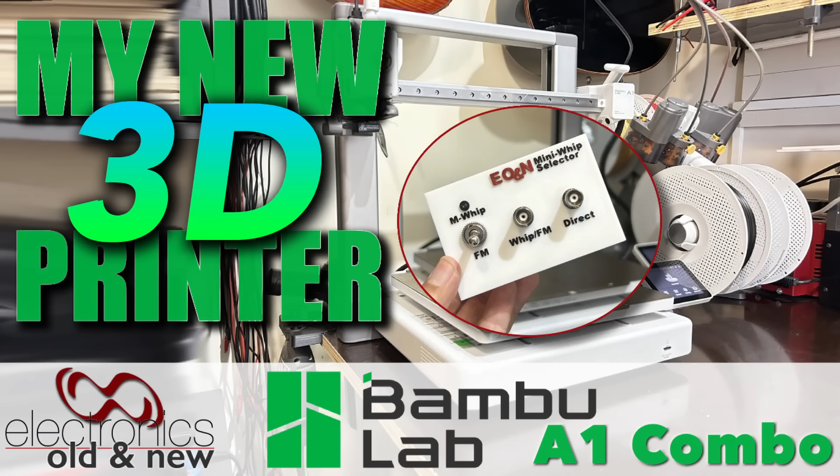Say hello to the new addition to my workshop, my new 3D printer. I got it about a week ago and I've been playing with it a lot. And I got to tell you, this thing is absolutely amazing. This thing is fast, really, really fast.

Now I got the combo version. It's the printer itself and it's got that thing over there. Now that thing over there takes 4 reels of filament, and you can see that they're different colors. What it means is that I can actually do multicolor printing. Few tricks involved, but it does work.

And the reason I really wanted this particular printer is that everything that I read and saw about it told me that this thing was incredibly fast. Did I mention it's fast? It is incredibly fast. When I first put this thing on, this thing was flying around so much, I thought the prints were going to be a total piece of rubbish. And instead, they came out better than my previous printer.

And my previous printer, believe me, I was getting old just watching it. It did its job, but it was incredibly, incredibly slow. I remember working with dot matrix printers in the old days, and when the inkjet came out, you notice that incredible difference in speed. Well, this is the same thing that I've experienced with this addition, and I've been playing with it quite a bit.

And the reason I'm doing this video is I want to show you how I use it to design and build new undershelf modules, which were becoming a bit of a problem because I was running out of the actual enclosures. And I also wanted to make this whole thing completely autonomous, so I wouldn't have to depend on any other service outside of my workshop to be able to do them. This thing allowed me to do it. This thing has replaced so many stages of the work that I had to do to build those undershelf modules. And I'm going to show you one of them.

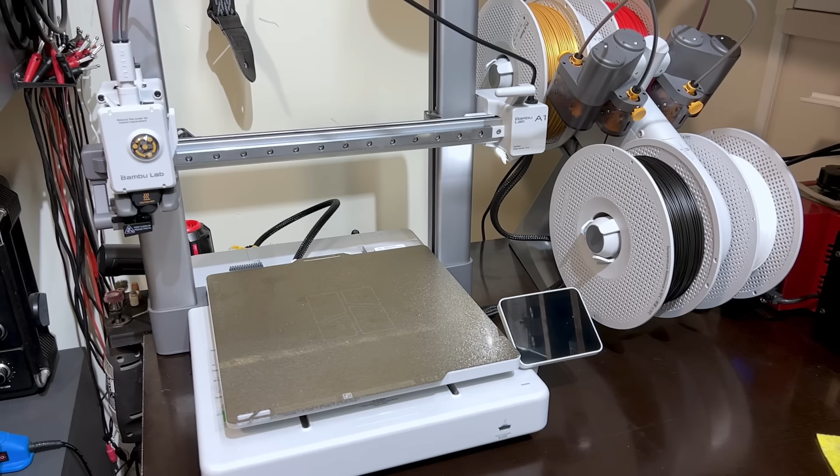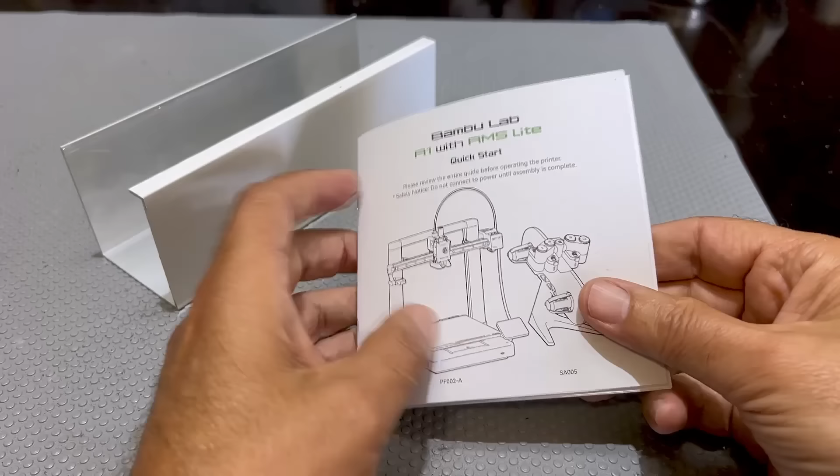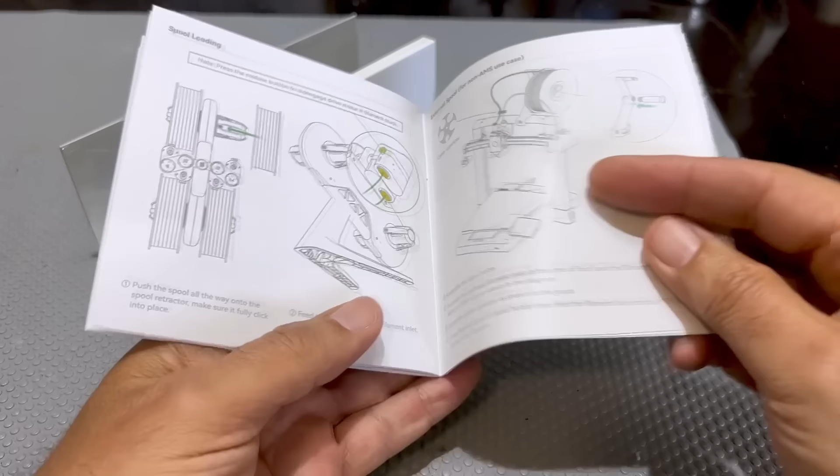Now, you can probably guess I'm not going to give this usual sort of unboxing video that people do. I don't particularly like that. What I did do is follow the instructions. They were very, very easy to follow. There's also a video that I'll link in the description below, which is very well done and describes it in really great detail. Incredibly easy to put together. I got this thing working and printing within probably less than an hour, and most of that was watching the video. So it's really the sort of thing that you just get and you can use pretty much straight away. So let me show you what I'm talking about when I talk about those undershelf projects.

I've been building these undershelf modules with all sorts of little tools and pieces of equipment that I need. This particular one is the mini whip antenna selector. It's looking worse for wear. It supplies the mini whip with the DC voltage that it needs. It brings in the signal. It then allows it to come out here. And I had a FM antenna coming in straight through there as well. I wanted to make this selectable, and that part of it is coming in a future video. But what I wanted to do is build this whole enclosure setup in a more efficient manner.

Now, I've been using these aluminum sections, which I had some metalwork shop cut for me. All this is, it's a rectangular section, and they cut there and they cut that off there, and it allows me to work on them. This is a 20 centimeter one. I also had 10 centimeter ones. I was limited to the 2 sizes that I had. If I wanted to use this, I'd need to get one of these cut somewhere, and I built up a bit of a stock, but I'm running out of them.

Then I would have to design the faceplate, drill the holes, right? Drill the holes, and after putting the board in or whatever electronics I wanted to put in there, I can then very easily solder to them.

This one is a real mess. That's why I wanted to change it. And then I would need to draw the faceplate as well. So I would draw that in a drawing program, I'd go to a printer's, they'd print it out on self-adhesive paper or film, and then I would stick it on there. Sometimes I sprayed it with lacquer just to protect it, cut the film out, put everything through. If I scratched this at all, I had to redo the whole thing.

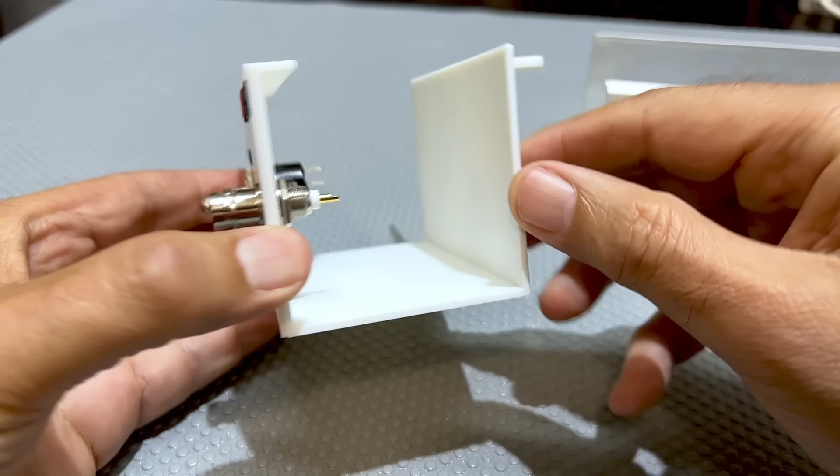At the back, I normally wouldn't even put a label on there, but I'd have to put one of these angle brackets on here so that I can connect it to the top. Now what I've done is I've made this whole thing 3D printable, and it really, really works out well. This is what I've got so far. Now, what have I got here? I've got the same profile because that's perfectly acceptable for me, and the shelf is already set up with these things.

I 3D printed the actual profile. The advantage here is I can make it whatever length I want. I can make it bigger or smaller. I don't have to stick to the 10 centimeters or 20 centimeters. So that's the first advantage. Secondly, when I print this, I already print it with the holes in there. So I don't have to worry about drilling the holes, making them bigger or smaller, deburring them.

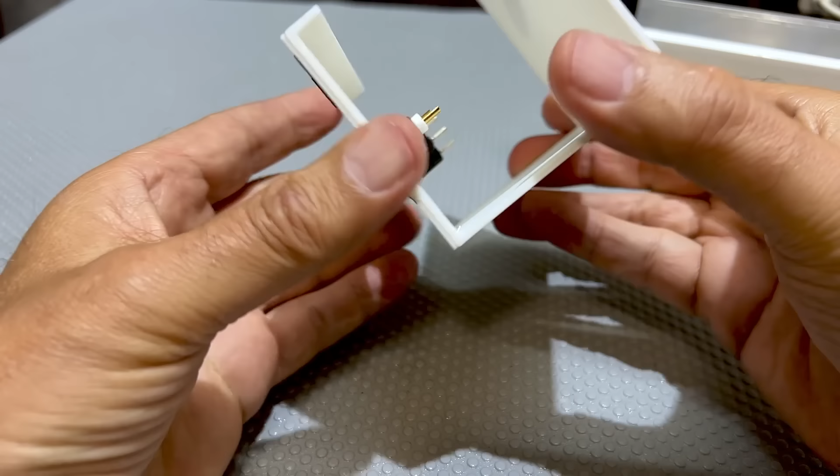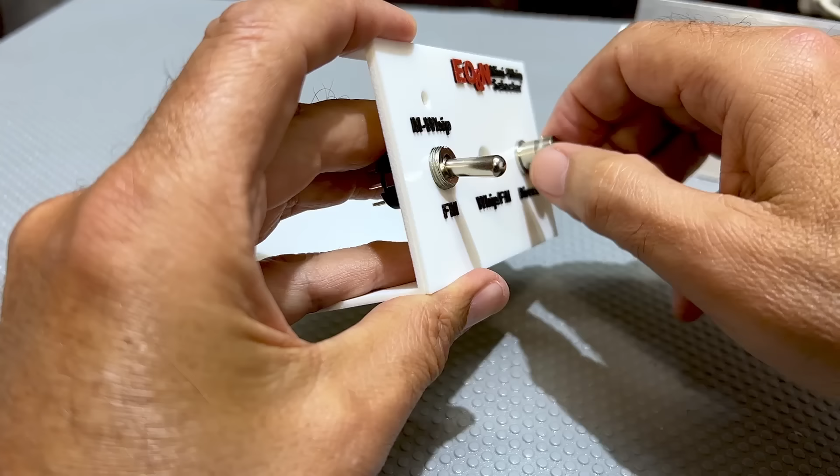The holes are there already, but there's something else here as well. I've made this as part of the enclosure itself, so I don't have to put that angle bracket on here. This particular one I've got to redo because I forgot to put the holes at the back. And the other thing is, because of this printer's color printing capabilities, I've also been able to do something else. And that is really one of the great advantages of having a color printer: you can actually print the labels.

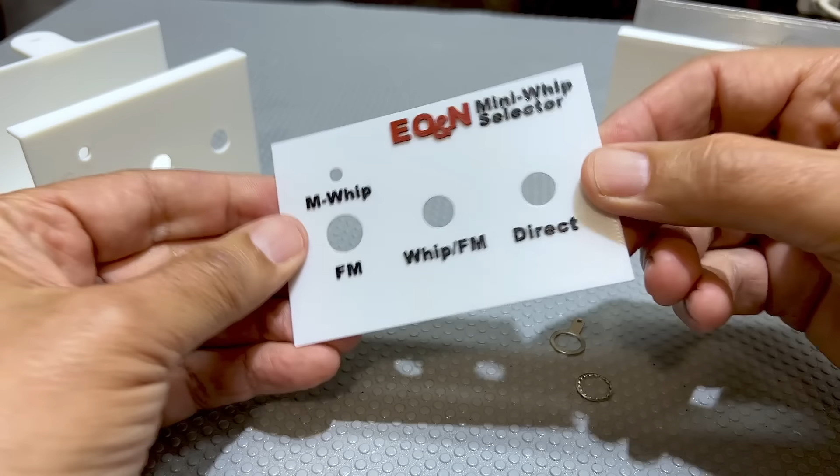What I've done is I've made a label section which will be exactly the same as the front. So it fits perfectly, and I can print the labels on here. It's actually pretty good. This is raised, it's embossed. And the reason I did it on here is because when I describe to you how the 3D printing works, you'll understand why I wanted to do this separately. Actually, I'll explain it now.

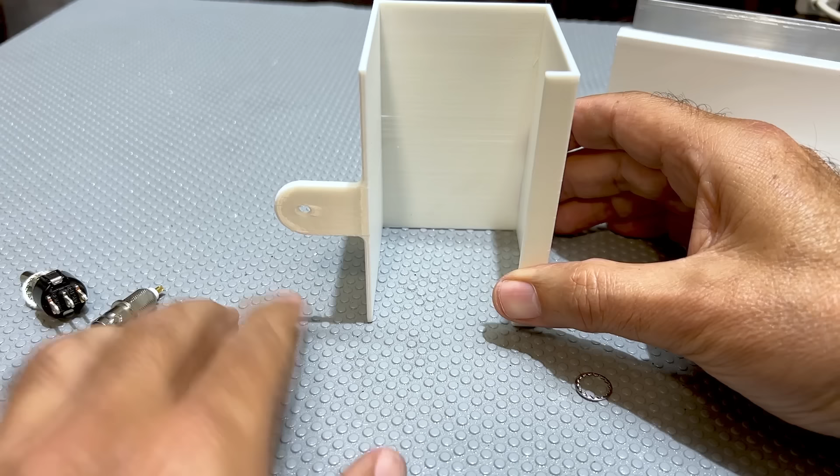When I print this particular one, I print it vertically. And the reason is it works well for me. It then needs very few supports. The only supports it needs are under here. And it actually does build supports up to make sure that these holes are perfectly round. You wouldn't need them really, but I'll let the whole thing do its business. So I print this thing vertically. And then when I print this, I print it horizontally.

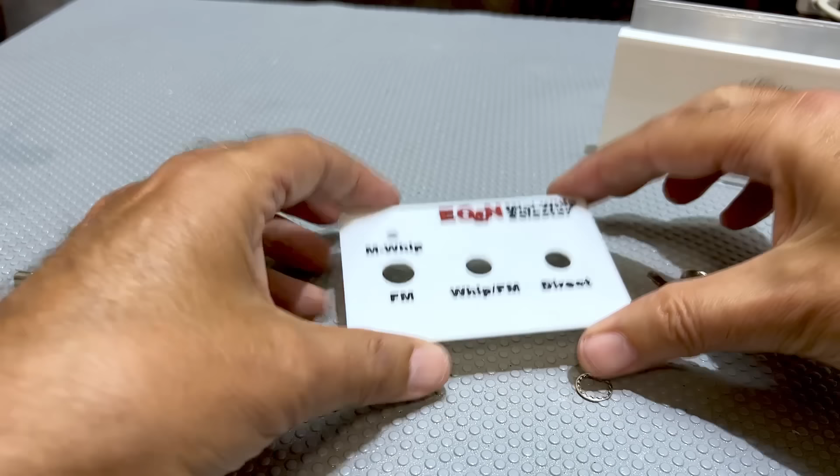And the reason is that when a 3D printer changes color, it actually changes the filament that's in the head. So you've got to think of this as a procedure coming from bottom to the top. It's printing from the bottom. First layer, second layer, third layer. So once I've printed this base in white, I now need to change the filament color to black. And if you see this Electronics Old and New logo, the beginning part is black. It's the same thickness as those letters.

It's in black. So what it does then is the printer goes and changes the filament, and it cleans out the old filament, and little pieces get thrown around. The poops, as they call them. So it's a little bit of wasted filament. So it cleans the head of the white filament. It then spools in the black filament, prints the layers that have this text on it in black, including the base of that E, O, and New.

And then it goes and changes filament again to red. So it cleans out the head again, brings in the new red filament, and it prints the layers that are in red over here. Now this is actually done in medium quality. I haven't even gone to extreme. This one was printed in the fast version, so the lowest resolution. I think it was 0.2 millimeter layer height, nothing special.

There are various presets on the printer itself, and I used the one that would give me the quickest print. And then this one, I put it to a better resolution because I wanted finer work on the lettering. And I am incredibly pleased with this. I am really pleased with this.

Now, you'll be saying, well, this is plastic and you might need shielding. Yes, you might. Now, I've been using the undershelf units without a common ground. So what I'm going to do here is just get some of that aluminium foil. If I need to shield it, I just put a layer on each side and I can decide what I want to do with the grounds.

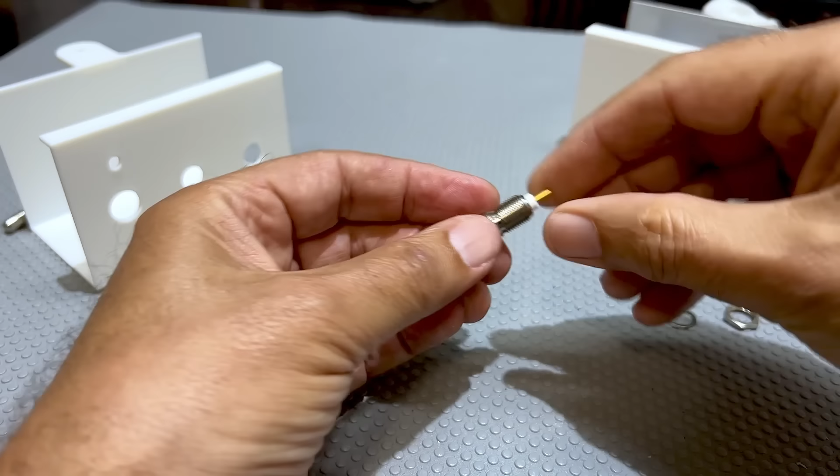The other thing is that a problem I had with this one is because I didn't want common grounds, I had to make sure that I used insulated connectors or sockets over here. These things are not the best. The ones that I prefer are these, but these are not insulated. I can't find the ones that have got the little bushing, the little plastic insulators, and these are the cheapest anyway.

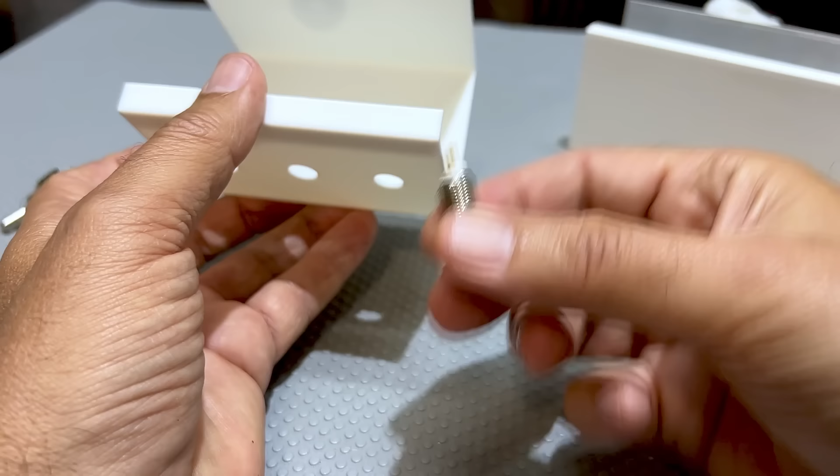So what I can do here is I can still use this plastic, but when I put the shield on here, I leave an opening where the socket's going to connect to, so it doesn't create a common ground if I don't want it that way.

So let me show you how I design this. I do this in Fusion 360. You can do it in SketchUp. You can do it in all sorts of CAD programs, 3D modeling programs. Fusion 360 is the one that I've basically learned enough of to not want to move away from it. Once you've learned something, stick to it.

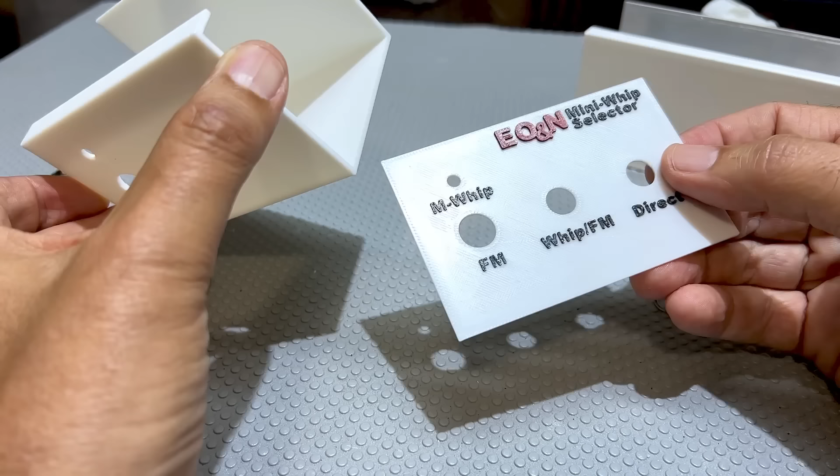And then I'll show you the slicer program that is actually indicated as the best one for this printer. It's actually Bambu Lab Studio. They've got their own one, and that was incredibly easy to use, especially for this particular printer. Just so that you know, one of the greatest features that I found on this is that you can actually send the files to print via your local network, via Wi-Fi.

Now, with the one that I had, I had to actually save it onto an SD card, change the SD card around, put it into the printer and print it that way. With this thing, I just send print from the computer and it does the job. So let me show you the design for this.

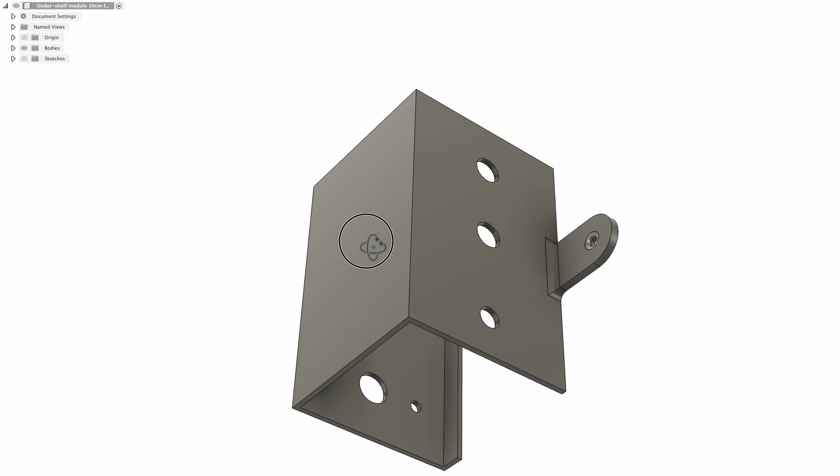Well, folks, here's the actual design of that module. I'm not going to go into all the detail on Fusion 360. This is not a tutorial on Fusion 360, but I will show you the steps that I went through to get there. And this is great because you can actually go to the beginning and start stepping forward, and you can actually see what was designed.

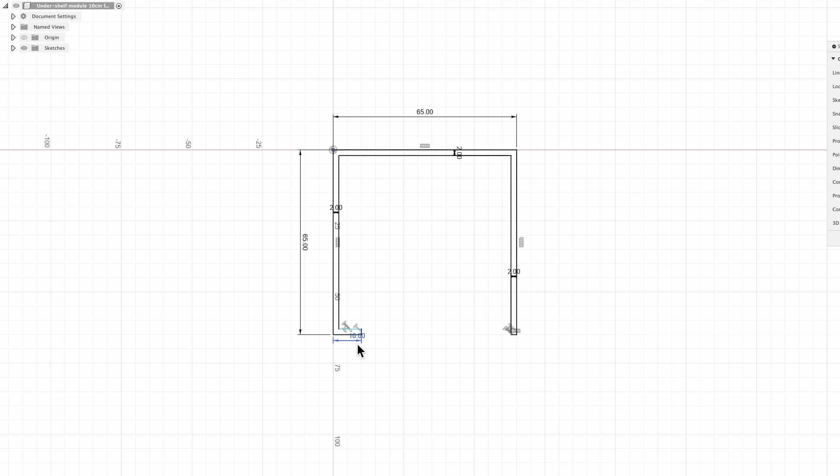If I look at the sketch that I did here, I created the element 65 by 65 millimeters, 10 millimeters there. I gave it a wall of 2 millimeters thickness, and then if you carry on going forward, you see what happens. This thing gets extruded. So I extruded up 10 centimeters.

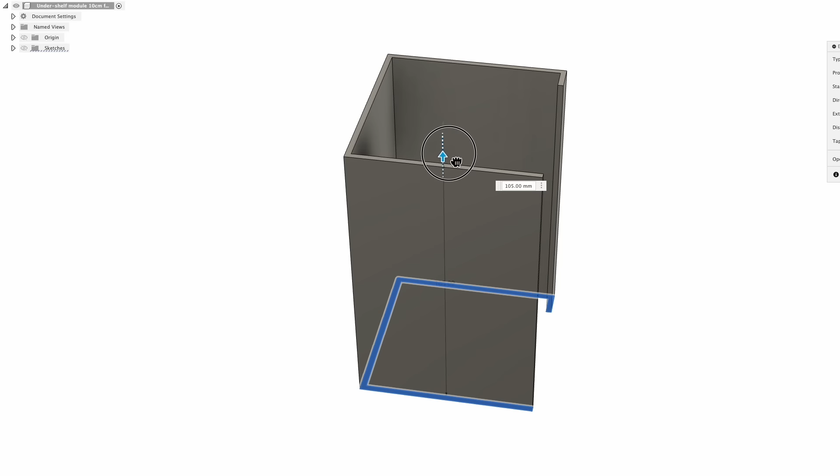Now this extrusion, here's the beauty of it. If I want to make this bigger or smaller, I can do that. I can make it any height I want. Now, as it is, I've got it at 100 because I designed everything for the previous version. So I left it at 100. But that is now something that I can use and make it as big or as small as I want.

And then if I take it one step further, what did I do next? I'm going on the timeline down below because you can actually step through. Yeah. I drew the 3 holes on here, and I can show you those as well. That is the 12 millimeter diameter.

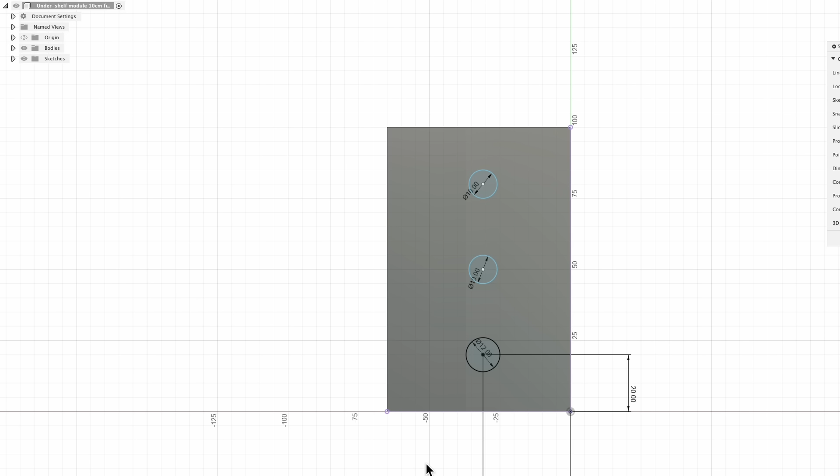This is about halfway up across, actually I should make it exactly halfway. Yeah, I'm probably going to shift this up a bit. This is 30, let's see, what did I make this? 31, so I can make it 65, 32 and a half, 32.5. Make that 32.5, and that will also go to 32.5. So I can just move that. What am I moving? 1.5 minus 1.5.

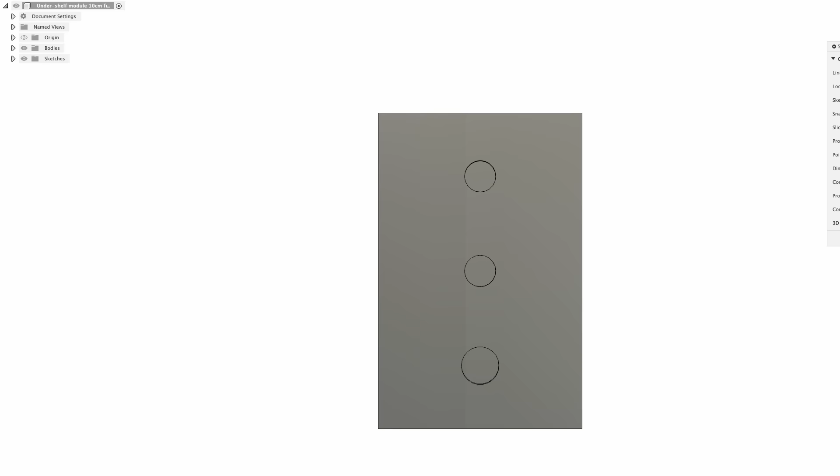Okay, so that gets done, and then you can extrude it and you get your holes. So I've got the holes in the front the way I want them. Brilliant. Nothing at the back yet. No rounding, no nothing. And then if I take it further, what did I do next?

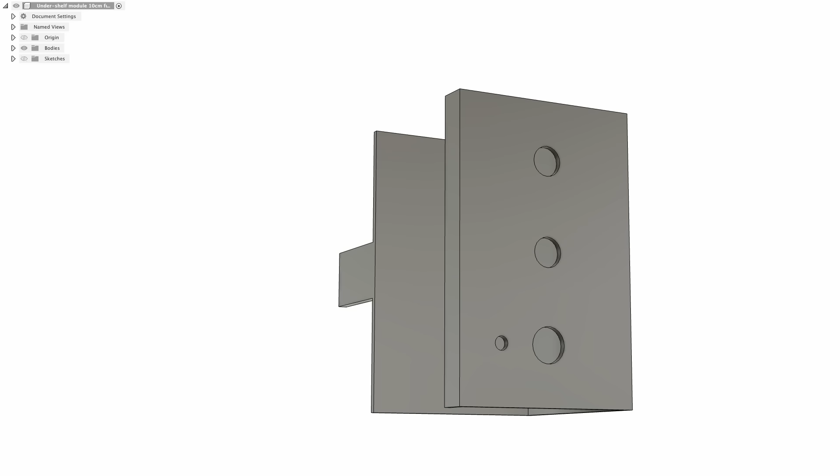Well, I made the hole for that LED, as you can see, nothing too special. And then I drew that element at the back because I wanted it to come out, and I wanted to do it all in one hole in there so that I can screw it to the underside of the shelf.

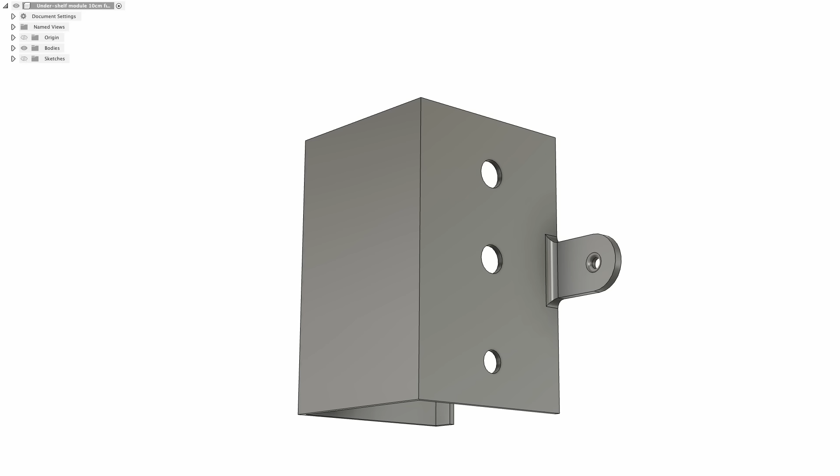I rounded the hole at the end there, and I made it a little bit nicer. Yeah, it's all nice and smooth and round. And then I put the holes in the back. Now the holes in the back, what did I use this for? I can't remember anymore. Yes, I put them at the back.

This one here is for the power. So 12 volt DC is going to go in here. It's a power socket. I'll be running this on a battery, which I'll show you when I build the project up. This one here is the mini whip coming in, and this one is the FM antenna coming in. Let me just check that this is halfway. I'm not sure if I did it the same as the other one. 32.5, yeah, that's halfway. So this is done.

Now, what do I do next? Well, I could do all sorts of other stuff. I could round this off. I'm not going to do that. I actually did a version where I built the sides up, but then I realized that working inside with the sides done is actually quite difficult. So I left it open, and I've designed these side panels that slip in here, which I'll show you in a moment.

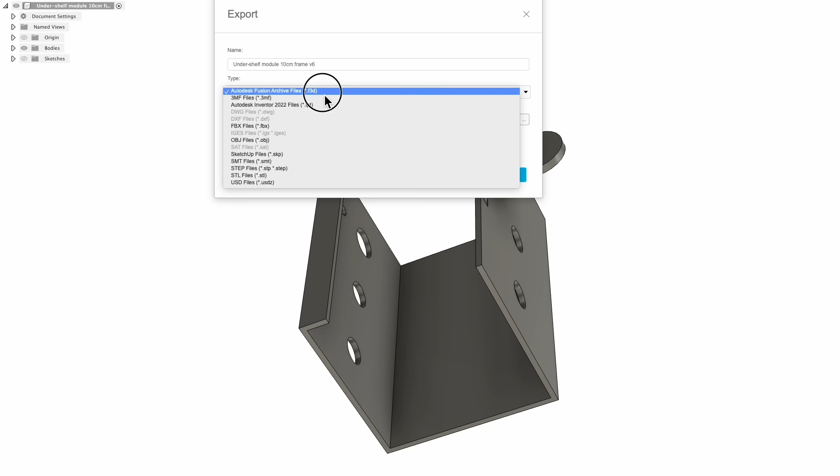But I can then export this. I'm going to export it in STL, and I'll export it to the desktop. I'll show you what I do with that next. So that's one part of this whole thing. Let me show you the other one.

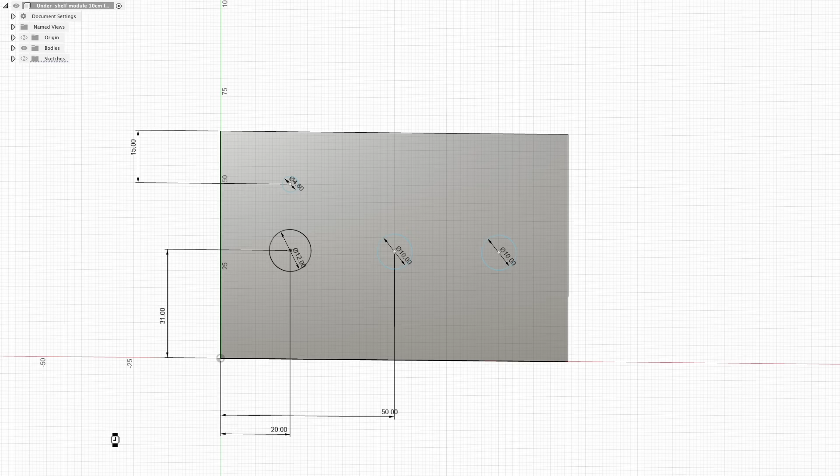Right, here's the front panel. And the front panel is practically the same as I did before. I do need to make one small change, and that is, I think it's on this one here. Yes, I need to make that 32.5. Otherwise, it will not match up with the ones I've got at the back, or rather on the main module.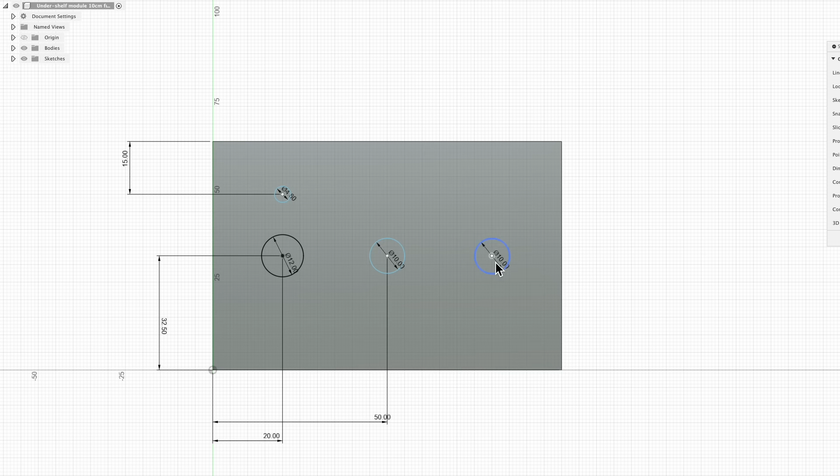So that's all done. And then this one is actually thinner. This is actually 1 millimeter thick. So you can see that. That's a very, very thin layer, done on purpose so that it doesn't actually add much thickness to the whole thing. Then what I did next, let me go back to the timeline. Then I put the logo on and the name of the module, and then of course the other labeling that I want done.

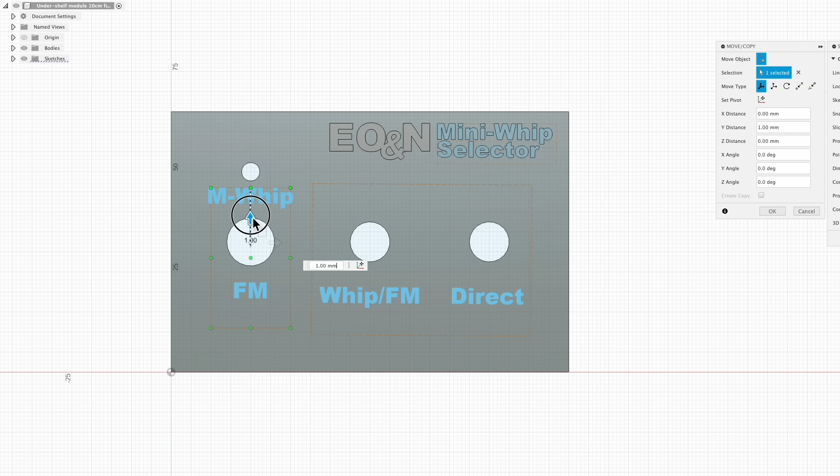Now, the way I did this is I did the writing on here, and then I extruded it. I should actually move this up 1 millimeter. What do I need to move it up? 1.5. Because I did the other one at 1.5.

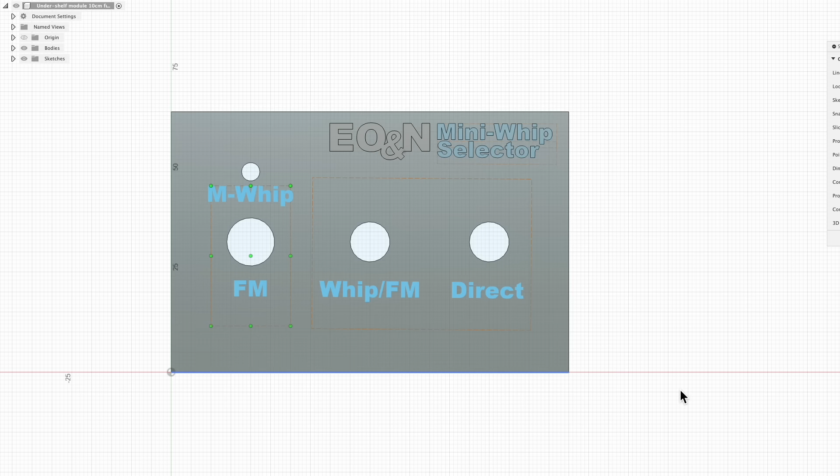So I've now got this as sort of a template, because I can come back at any time and change this. I can actually edit this. You see, if I do a different unit, I can edit this whole thing, change the text on there, and I'll have a new faceplate. But this one is ready, and I'm going to save it. And I'm going to do the same thing. I'm going to export it to STL. This is the front panel. Export that to STL. Okay, that's gone.

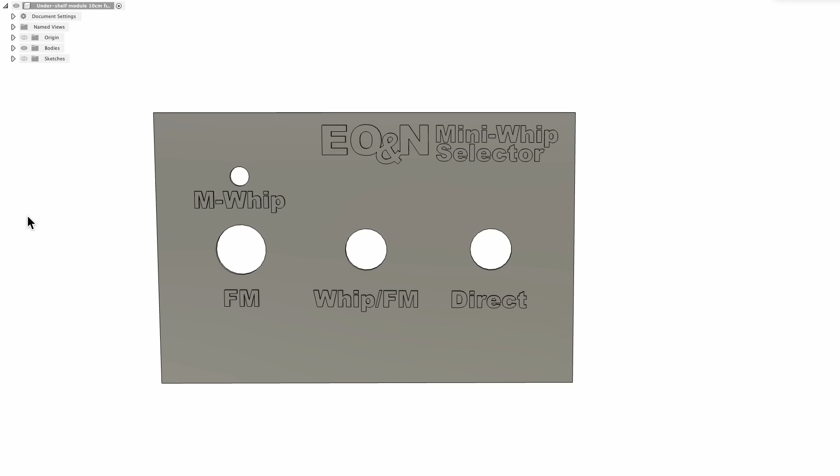Now I've got another one, which is the back panel. And the back panel is practically the same idea. I designed it. I did a cutout there for that little unit that's going backwards to hold that L bracket. And as you can see, this thing is also 1 millimeter thick. This one I can export as is. I'm not making any changes.

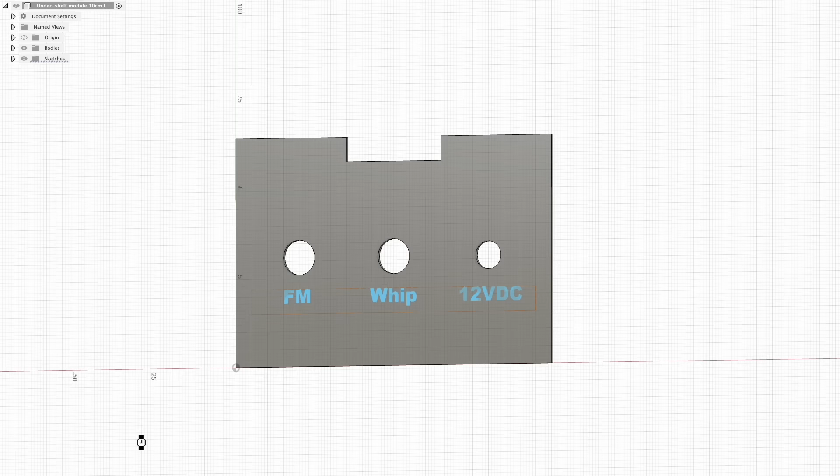But as you can see, I can very easily edit any of this, depending on what I want to print. So effectively, these 3 files are going to be here as templates in a way, so that I can then just adjust it any way I want, depending on what module I'm building. So let me export this one as well.

Right, and I have one more thing here, which is this one. This is the side panel that I've designed, and this thing takes 2, but I print one and then I mirror it and I print the other one, and it fits nicely into the side.

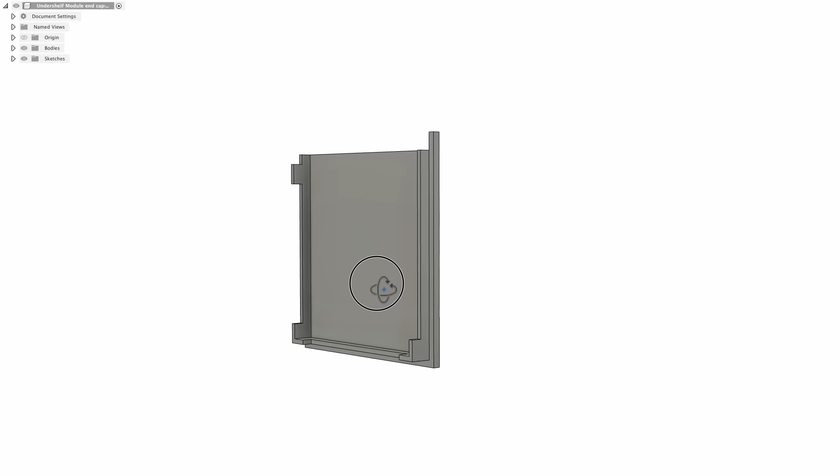There's no mystery here. You've got to look at quite a few tutorials on Fusion 360 to get to this point. Some of you will be faster, some of you will be slower, but it's actually very logical. This whole idea of modeling in 3D is very, very logical. I like it. So let me export that one as well.

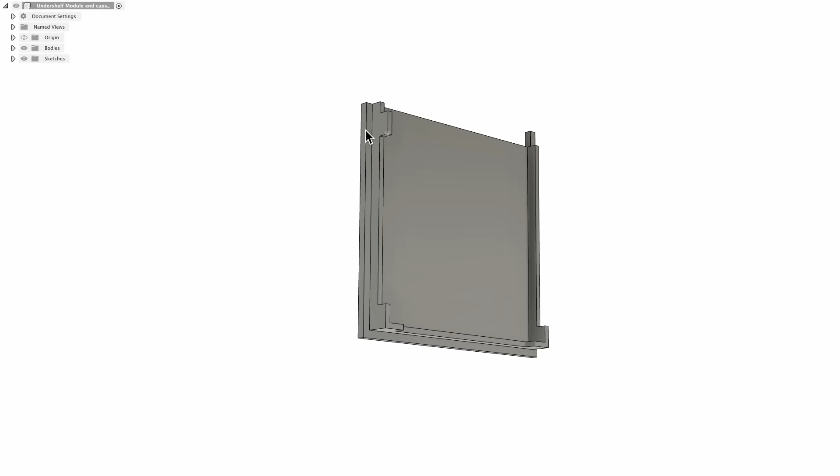Right, so we're finished with Fusion 360. Now we've got to slice it. We've got files that are 3D model files, STL files, and now we've got to bring it into the actual program that creates the file that the printer wants to see. Let me show you what that looks like. And here's the software that I use. This is Bambu Studio, so you download it for free.

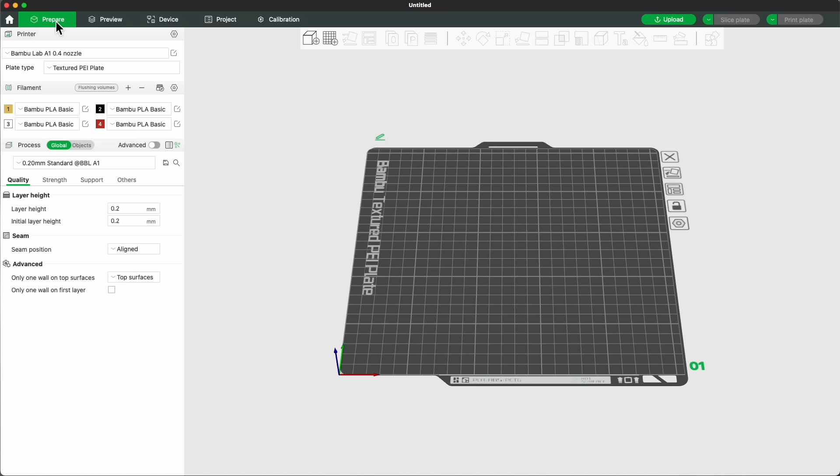And in that description that I gave you in the beginning, or showed you very briefly, your printer is actually connected to the network, which means that from here I can send prints immediately to the printer and it'll just start doing its thing. But if I want to prepare a project like I want to do now, and I'm going to do the frame first, so I had it on the desktop, I just bring it in here and look what happens. Now, when I set this up, I literally left it like this and I said slice plate.

I hadn't put, okay, it's telling me that I haven't got support. Okay, no problem. But I literally did that with just something else I was trying, and I sent to print. I'm not going to do it this way. I'm going to actually go back, and I'm going to show you what happens here. The one thing that I've decided to do is I've decided to print it flat. So I'm going to actually do that.

Go back to prepare. And the one thing you need to do here is you need to tell it which filament to use first. Remember, I've got 4 filaments. I've changed now to black. These are the filaments over here. This is using the AMS, automatic, what is it, management system, is it? Something like that. I can choose any of the filaments that I have on there. I've got gold, I've got black, I've got white, I've got red. I've actually just gone down here, changed filaments to black, to white rather.

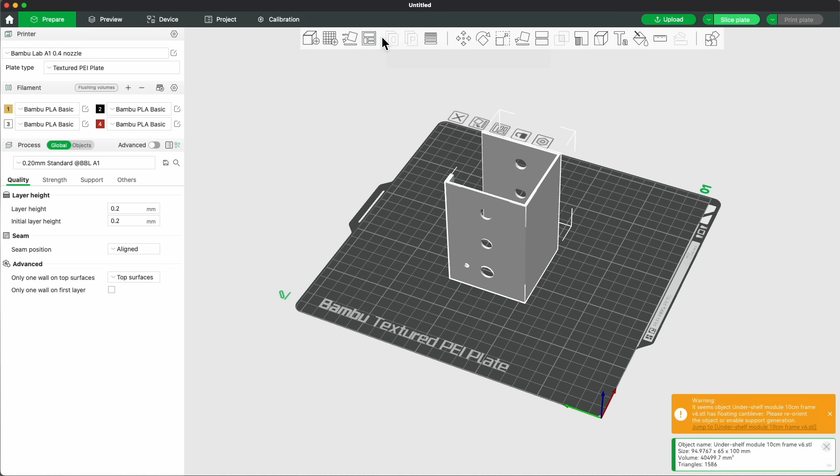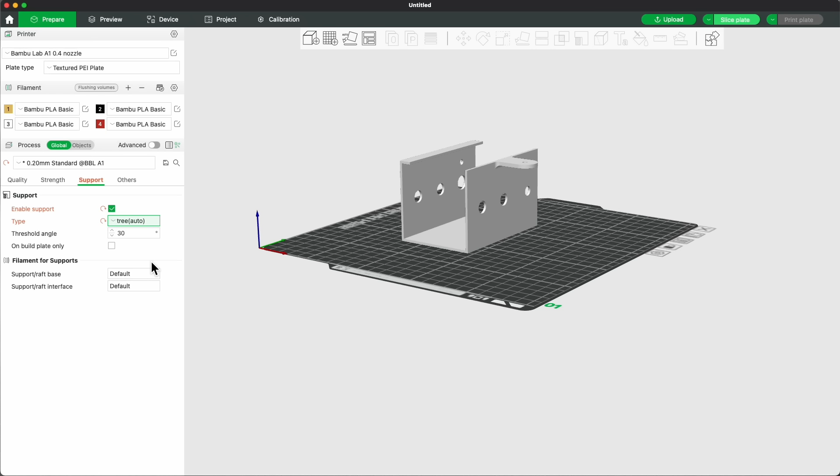So that's white. Now I'm going to just rotate this, and I'm going to rotate it so that it's flat. There. And I think I can just print it like this now, but see, this thing is an overhang, and that's an overhang. So I'm going to give it, let's see, I'm doing the presets. I'm using the presets as standard. Strength comes out at 15%. I didn't change any of this. The only thing I did is I enabled supports, and I've made it tree. Just because I prefer them. They're easier to remove.

And if I slice it now, this is the slicing. This is what's going to print. Okay, the greens are the supports, and you just pop them out at the end. But you see, literally just using a preset, the standard, and just adding supports. And I can now, let's see what time this gives me. It gives me 6 minutes, 20 seconds prepare, printing time 1 hour 47. So this thing takes quite a while to prepare because it actually does bed leveling. It does all the configurations by itself before it starts printing. But this thing prints in 1 hour 47 minutes.

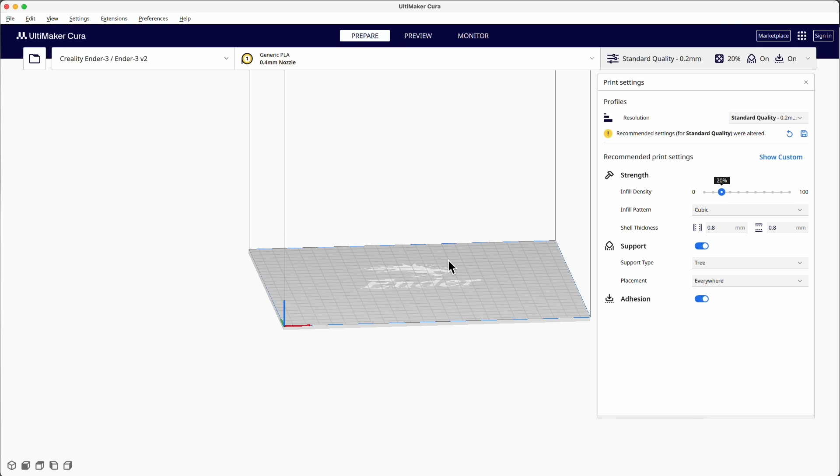Now, let us see what happens if I try to do the same thing with the other slicer on the other printer. Now, this is the slicer that I used to use, and it's configured. It's standard 0.2 millimeters as well. And if I do that, let me just push, where is it? I've forgotten how to use this now. Tree, yeah, I've got supports, okay. And I'm going to say slice. Nine hours, 9 minutes. Bloody hell, even I'd forgotten how long this took. 9 hours, 9 minutes, and I've got everything practically the same. 0.2 millimeters.

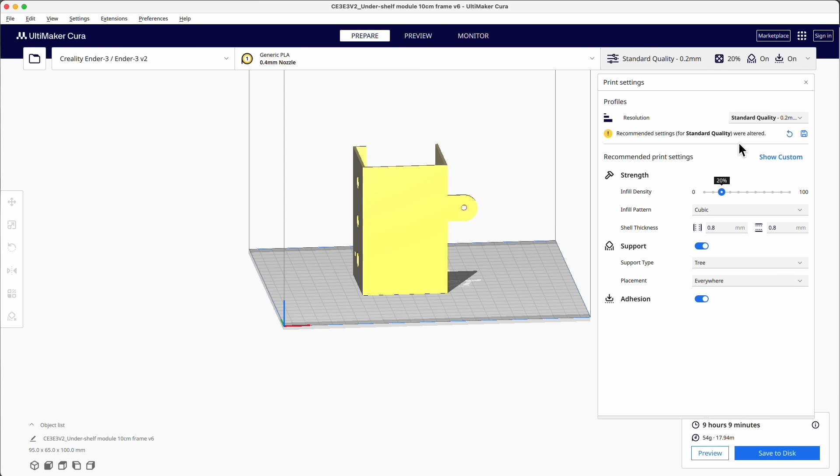What have I done here? I've put 20%. Let me put 15%. It's going to make very little difference, but 9 hours, 9 minutes. Whereas the one that I've got here says 1 hour, 47 minutes. See what I mean by fast? This is incredible. Now, all I need to do, I just want to check that I've got everything. I'm going to push print.

And it's detected my printer on the network. Let's see, what is it doing? Refresh, what am I doing? Bed leveling, I can get it to bed level. I always do this. I just leave it as standard bed leveling, flow dynamic calibration, enable AMS because I'm using one of the filaments. You can do a time-lapse film and all that jazz. I don't need that. I just send it. I don't have to save it to an SD card or anything like that. And I should hear this thing start going funny on my left here as soon as this goes through. And then it starts giving me the progress.

There we go. It's jumped to the device setting.

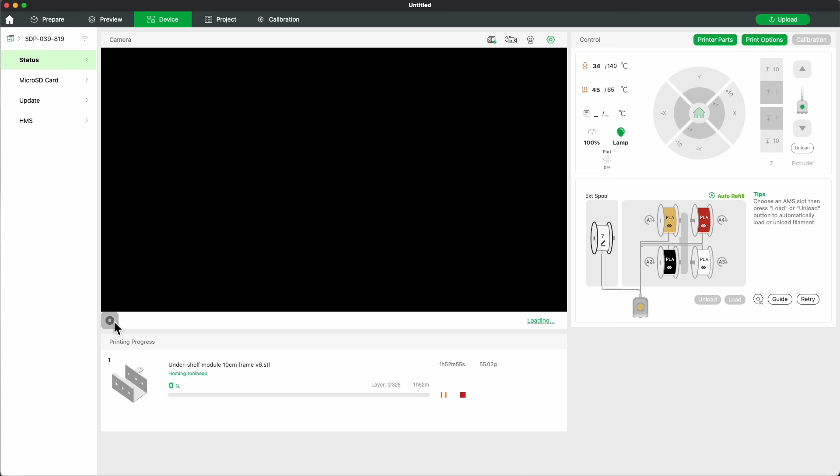There, the printer's starting. It's actually quite amazing. It's got a camera in there that you can see remotely. It's very slow frame rate, but it gives you an idea of the progress. You can see the mess in the background there. That's the box that came in. So I've got to clean this place up. But it's doing its business.

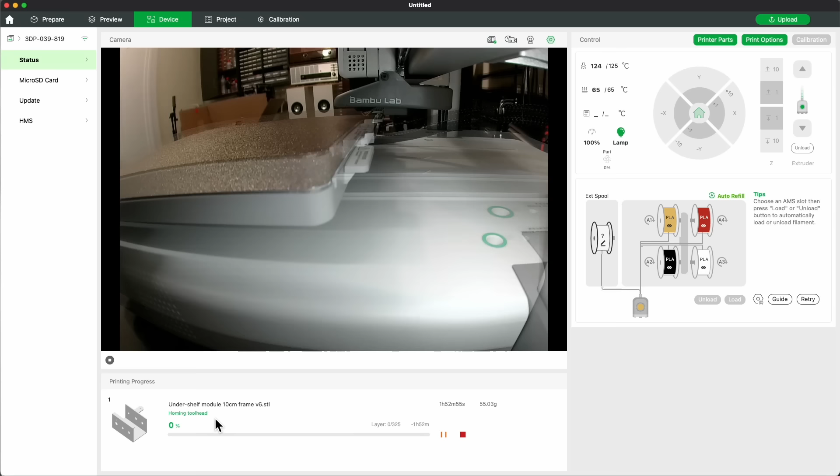It's aligning itself. It's, what is it, homing the tool head. It does all these funny things, and then it starts working, okay? So that's what I'm going to leave for a while because I want to show you the result when this thing finishes printing. I'm not going to show you layer by layer. No, I don't want you to get old. I mean, this thing is fast, but 1 hour, 47 minutes is still a pretty precious part of your life and mine. All right, I'll show you when I've got that done.

And here's the result so far. I printed the main section. This thing really does a great job, as I've kept repeating. I'm just so fascinated. And at the end, you're left with all these trees. These were the supports. You can also do the normal supports, which are just vertical. These things come out quite easily. You let the bed cool down a bit, and then it pops off the bed.

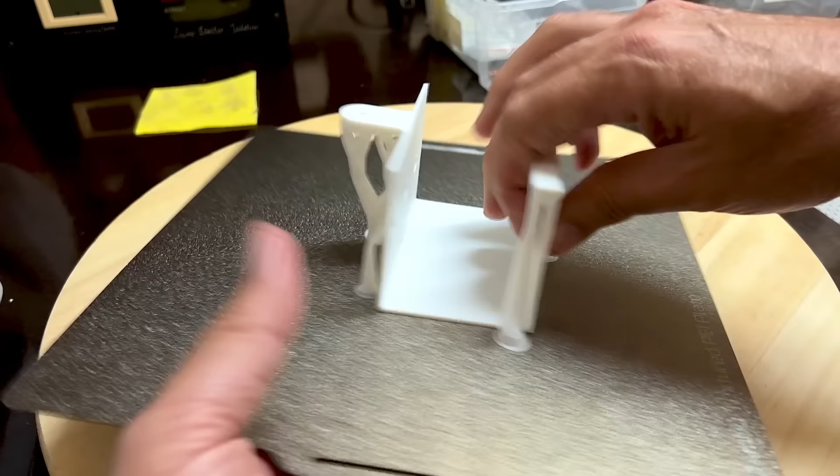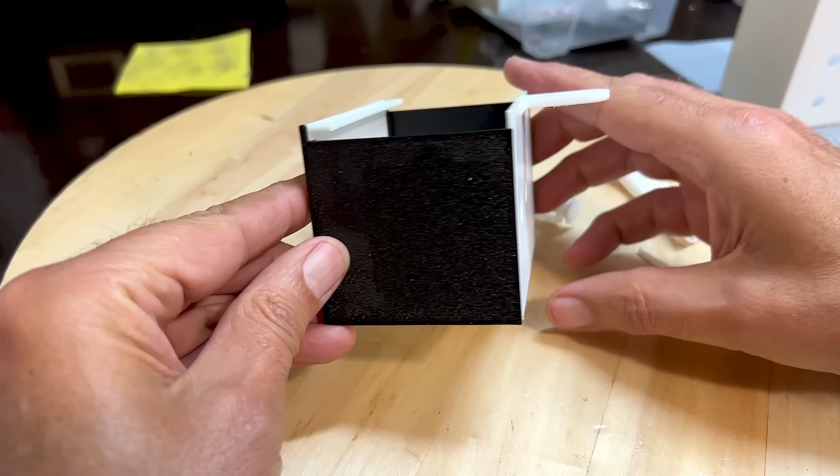And you break these away. They break off quite easily. In this particular case, I pulled it off probably while it was still hot, so it did pull a little bit of that off, but this is on the underside, so I'm not too worried about it. I'm not going to print it again. And then, of course, I printed the sides, which I didn't even show you because it was just a matter of printing and choosing the black filament. And now I'm going to do the interesting part, which is the faceplate with the multicolor printing. That is always cool to watch.

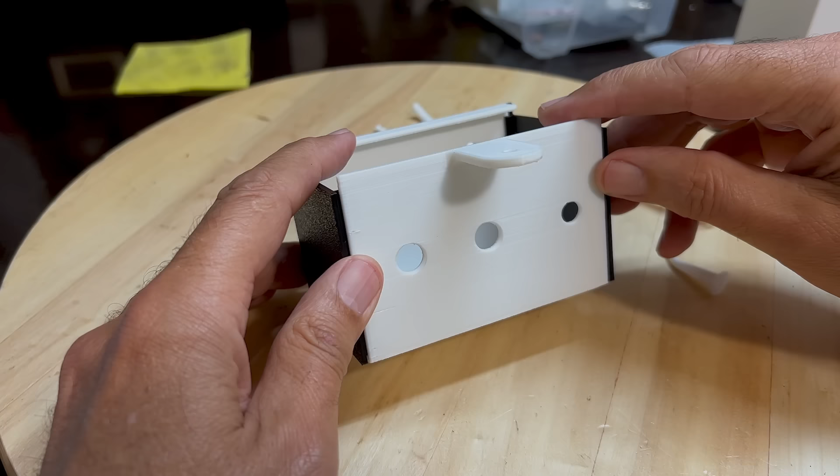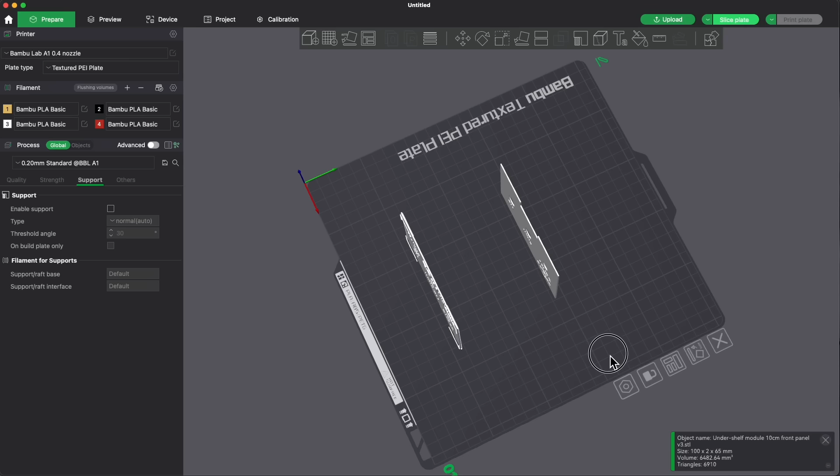Right, let's do the faceplate. So let's bring one in. I'm going to do the two at the same time because they're both the same colors. Now, first of all, I've got to change the filament color to white. The base filament color is white. All right, let's lie these guys flat. Flat on the bed. Okay. I'll just put them together.

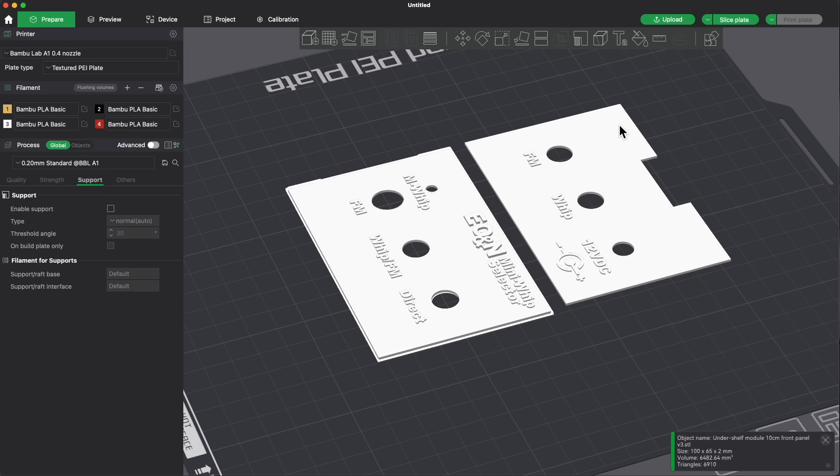Now, these two are the same thickness. You can see that. And the lettering is the same height. So this lettering here and that lettering here is the same height. And that one is the only one that sticks out a bit more. Okay. So what I'm going to do now is start painting it. Now we've got the base as white. Now what you do, choose one. I think you may be able to choose two. I'm not sure. No, you can't. Anyway, you go to painting.

Okay. And the way I do it, this is the easiest way that I've learned. You can paint this like anything you want. Okay. I'm just going to undo that. You choose the color of the filament and you use paint. But that's not the way I like to do it. I want to do layers. And remember, I'm still sort of learning this, right? So I choose height range and I click on there.

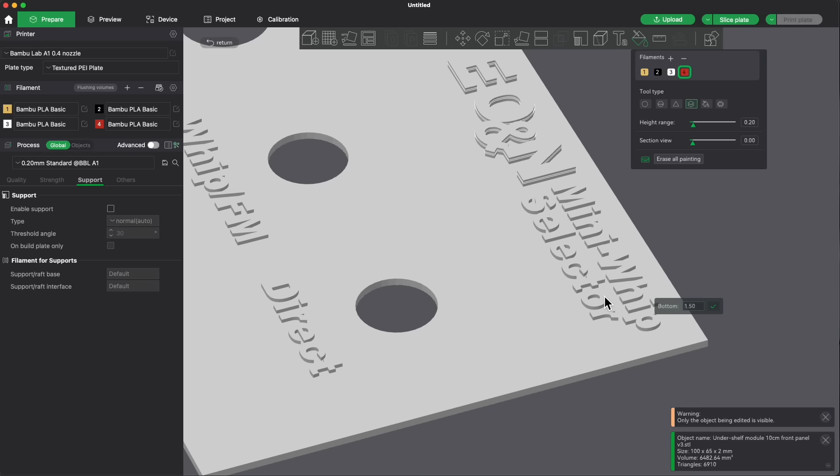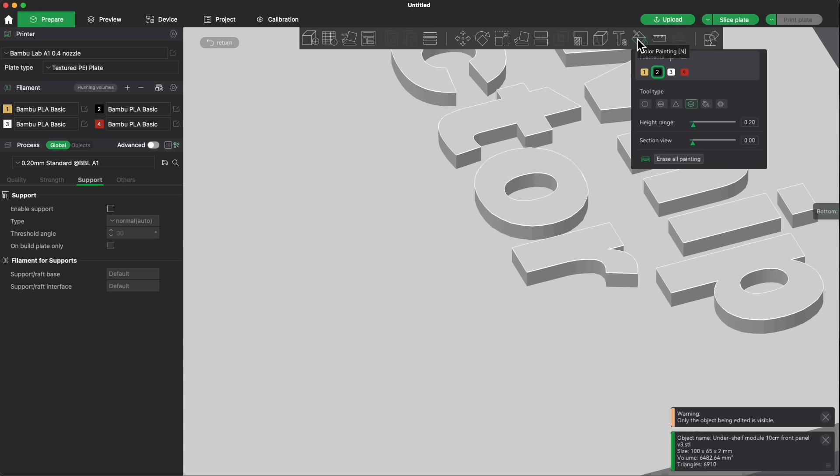Yeah, there we go. Now, if I go here, I can, oh, wrong color. Stupid. I want black. I want that to be black. Start again. Choose the color, choose black. That's black, but I want to give it some thickness, so I'm going to paint. Oh, I went too far. I touched the bottom. There, that'll do it.

All that lettering on that height, remember this thing's printing from the bottom up. All that there is now black, including, as you can see, the bottom part of that. Now I've got to go and change to red, and I do that guy, and I'm going to give that thickness. There we go. That's all it takes. That's literally all it takes.

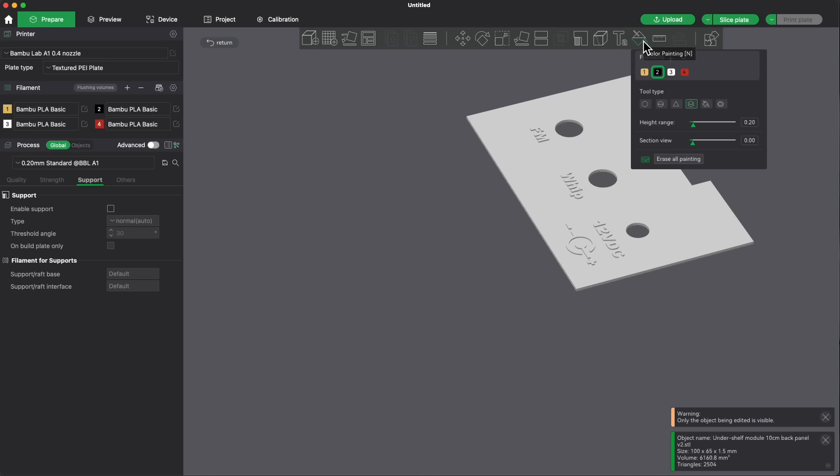Now, if I return and try this one, it's easier. I'm just going to choose black there and do the same thing. Give it some layering.

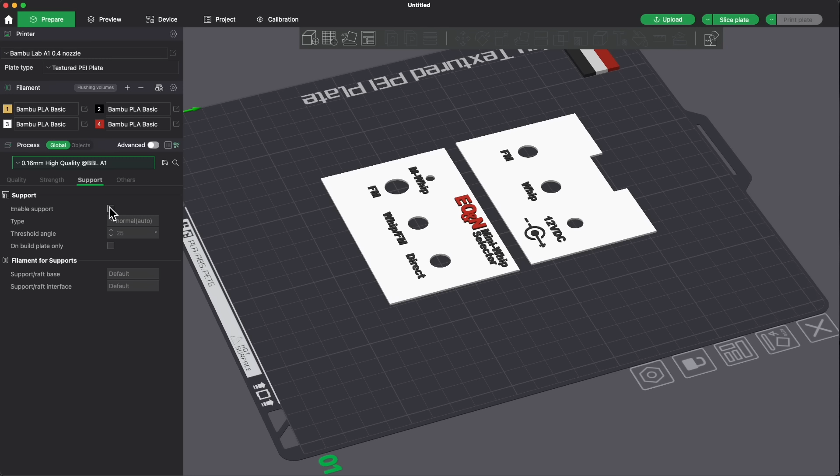That should be it. That really should be it. Now, what I'm going to do here is I'm going to do not the standard. That's 0.2. I'm going to give it 0.16 high quality. Bambu Lab A1. There we go. I don't need supports. And I'm not going to do anything else. I'm not doing anything else.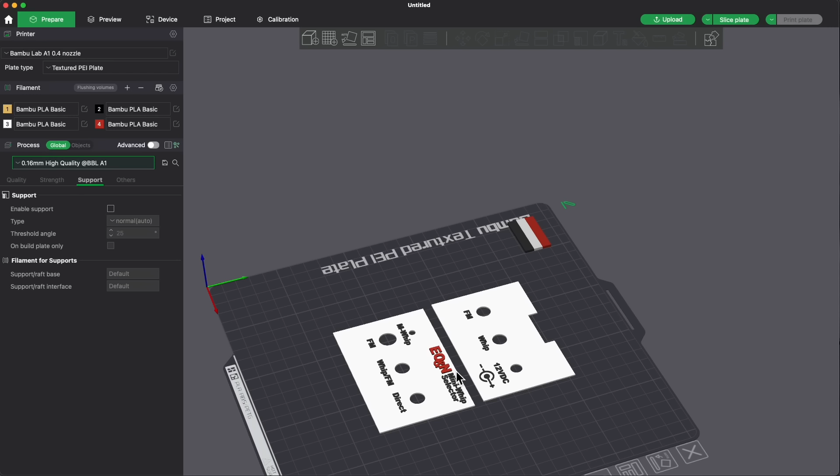Now, just check this out here. This is cool. It creates a little platform on the end with all the colors that are used in order to basically start the printing. I think it's to prepare the nozzle and the flow rate, because it actually checks the flow rate, I think, to ensure, is that it? Am I making this up? I think it's to ensure that, this seems to be illogical to me. It's to ensure that the flow rate is good when it goes and does the change of color. I actually thought this should be vertical. Anyway, as you can see, I'm still in the throes of the initial learning phase of this thing.

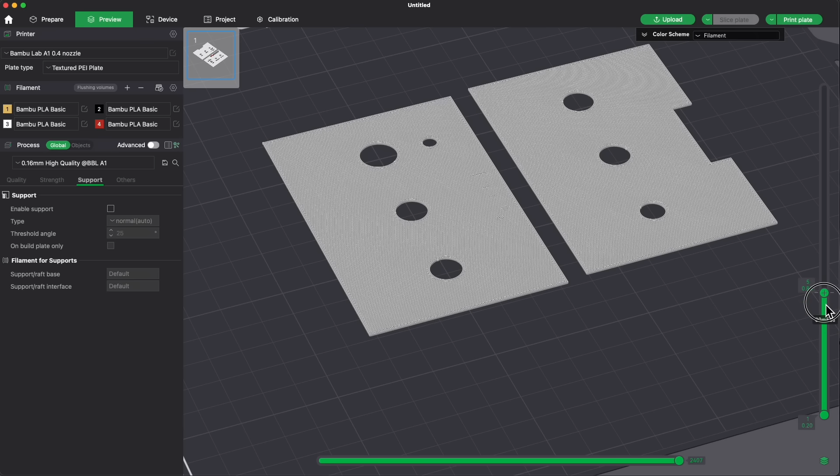So I'm going to slice the plate, and it should do it in 45 minutes. Okay. Oh, by the way, if you want to see what's happening here, this here gives you the layers. And you can go down. Actually let's go to the bottom. When it starts at the bottom, it starts with the base layer. 3, 4, 5, 6, 7. It starts with the lettering in black, right? Layer 8, more lettering in black, more lettering in black, and then when it finally gets to the top, it prints the last 2 layers in red, just on that part over there.

Okay, so let's print this thing. And it knows it's using 3 colors, black, white, and red. I'm leaving everything the same. I really want to show you that I'm not one of those people that sits and changes speeds and all that jazz. I don't know how to do it. When I find out how to do it, I probably will. But at the moment, I leave everything as standard as I can.

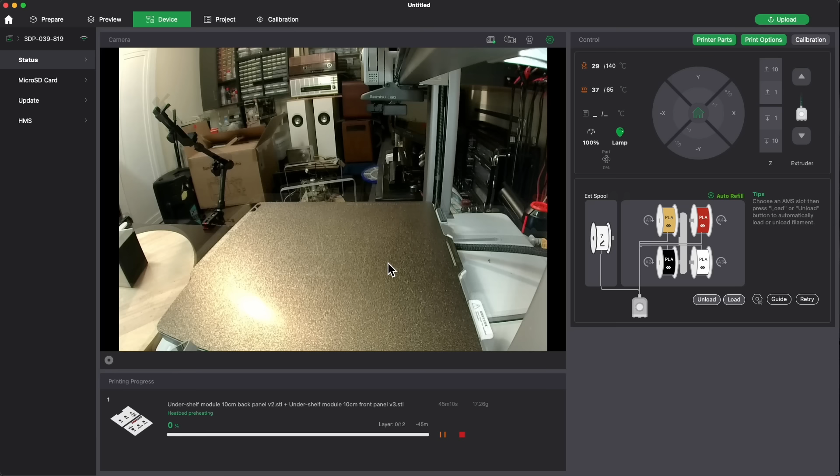I really love this wireless idea. You just send it and it starts the business, and you don't have to worry about popping out SD cards, and you don't know which way around it is, because the other one I had a very small SD card. There's micro SD cards. So, yeah, okay. Next time you see it, hopefully we'll have some face plates front and back.

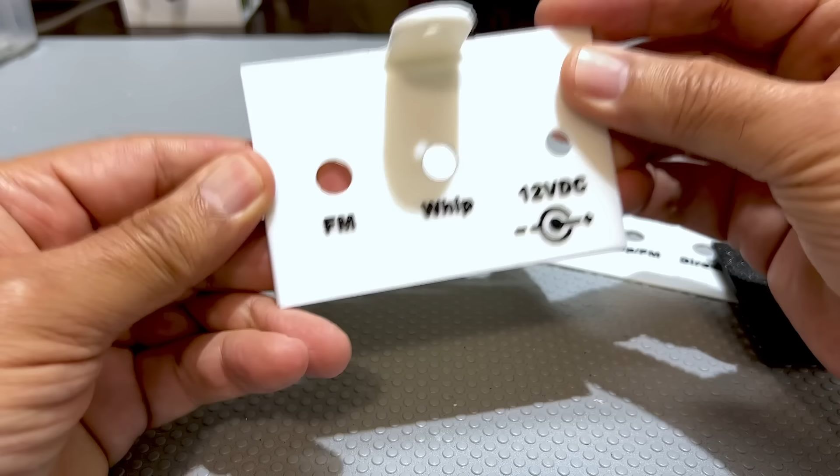So here we go, all parts printed. And I had to redo this one because I had actually made a mistake on the spacing at the back, believe it or not. This is the beauty of having a machine where you can do your own prototyping, because you can just redo it. So I redid this one, and the other thing I noticed is that this one is best printed vertically, because when I printed like that, there was a little bit of an indent there, which could have been pulled out, but I preferred to do it like that. It came out pretty much perfectly.

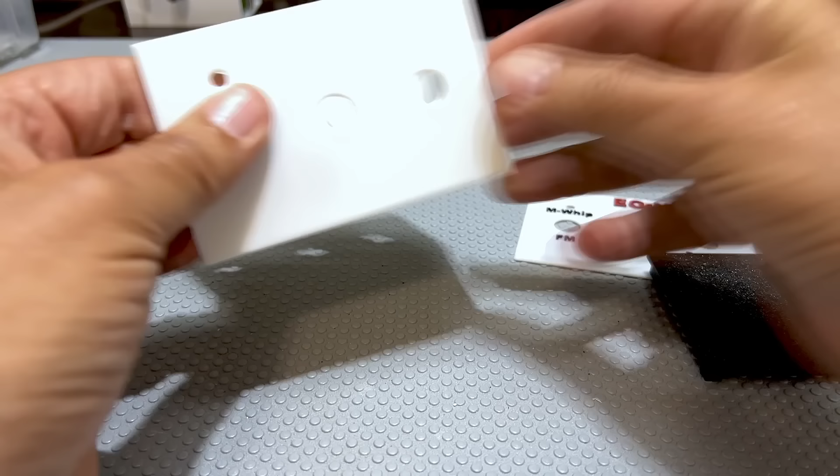And now all I need to do is start applying, well, let me show you the other parts. This is the back end, which will go there. Here's the faceplate, which will go there. And these are the side panels, and they fit like that on this side and like that on that side. I had to leave that little indent so that it can clip onto that rail that I've got under the shelf. And now it's time to put this thing together.

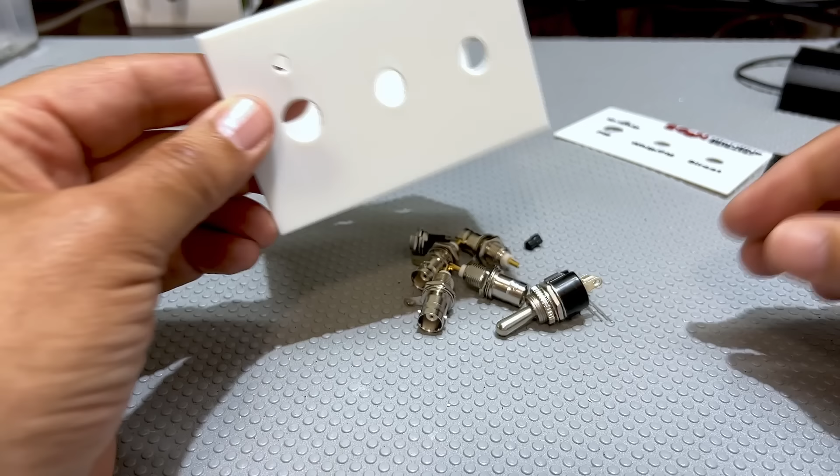And what I'm going to do is I'm going to put the hardware that mounts on the front and the back. So all I need to do now is I can place this over here and start adding the hardware which will hold it in place. And I'll do that and then show you the result.

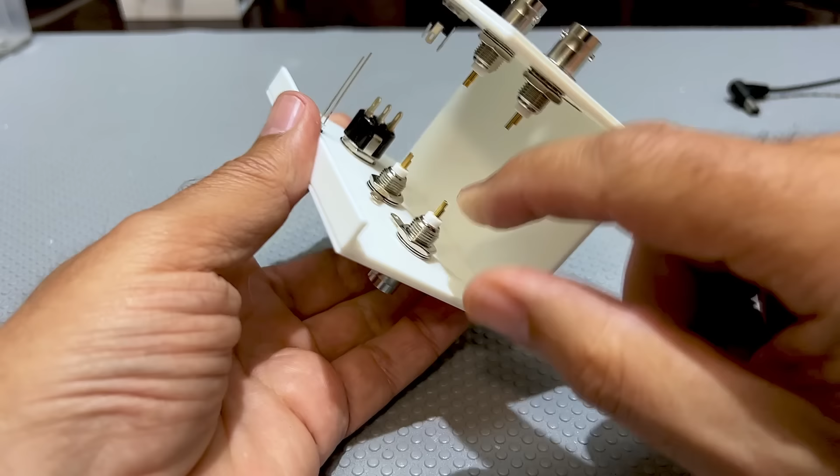And here's the final result with all the sockets and switches on the front. As you can see, these guys are actually holding that little faceplate in place. There's no need for glue. I mean, if I did this, I can warp it, but this thing is perfectly flat. So with these 3, it holds it perfectly in place. It's easy to access and work on. This is why I left the sides open.

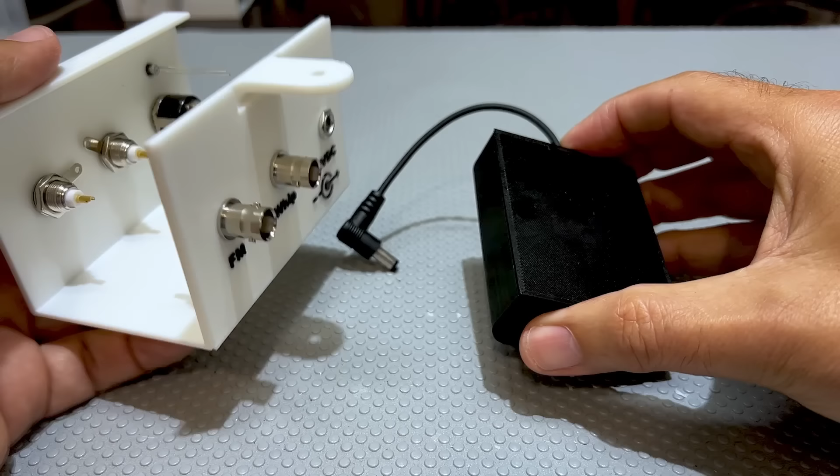The back, same story. I've got my 12-volt DC supply here, which I'm actually going to be supplying from a battery pack. I'm not going to use a transformer this time. I wanted to make the supply to this as clean as possible, so I built this 3-element 18650 with a battery management system.

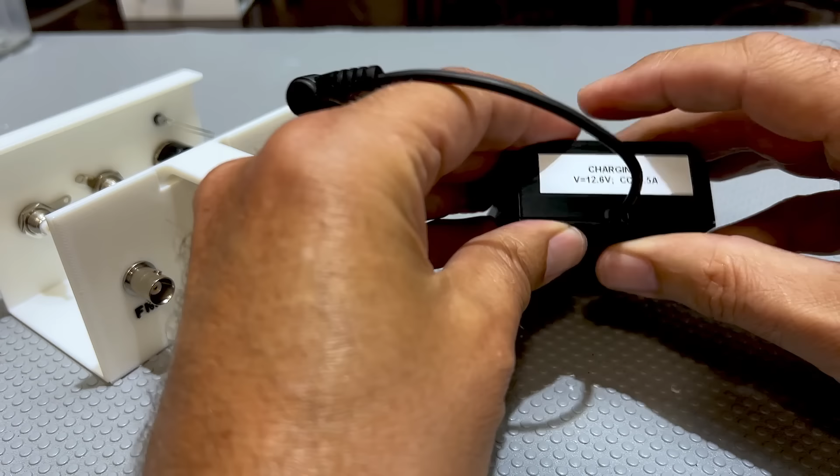It gives me between 12.6 and 11.1 or something, and then I can charge it normally. I've got a little note here as to how to charge this thing. This thing has the socket here, the jack, and it will plug into here, and it will probably be velcroed to the back of the panel, the top.

I will probably be using this idea with a few more elements on my system over here, because some of them really need clean supplies, and preferably not ground referenced. This is not ground referenced because this is obviously not conductive, but I may buy or use a sheet of aluminium foil, the self-adhesive stuff. Put one there, one there, one there, make sure they're touching, and make sure they're not touching those elements, because I don't want them shorted to ground, and because it will pick up noise in this particular case.

But that's it. I am extremely pleased with this result. This thing has worked perfectly, and I know myself quite well. I will be making changes. I think I'm going to get rid of that ridge, or that bezel, whatever they call it there, and make this thing fit snugly. Maybe not. Maybe I will. I know I'll probably change something. I may actually make this embedded, sunk in rather than coming out. Again, I'm going to play with this thing. The point is that it's very easy to produce and to change.

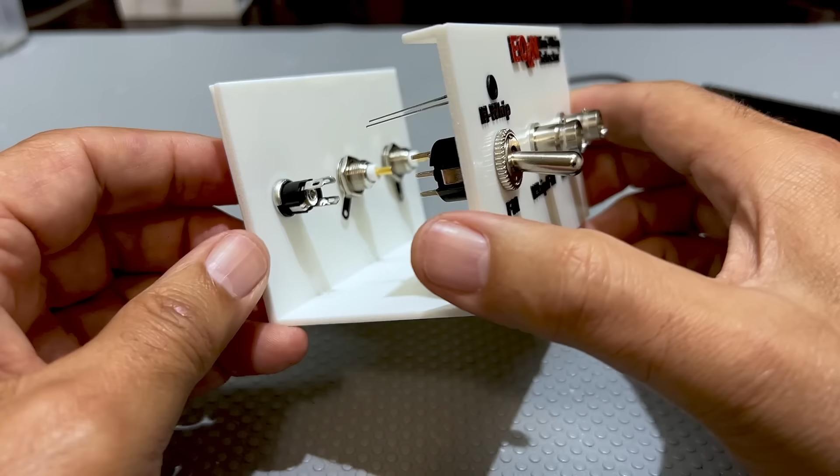And this is the beauty of having a machine at home that you can do your own prototyping on, because prototyping never ends. This is my problem. I never stop changing stuff, trying new things, see what it looks like, see if it's better than the last. You know, that's what you do. So this is it. This is the result of my new Bambu Lab A1 Combo printer, the combo version with the multicolored filaments.

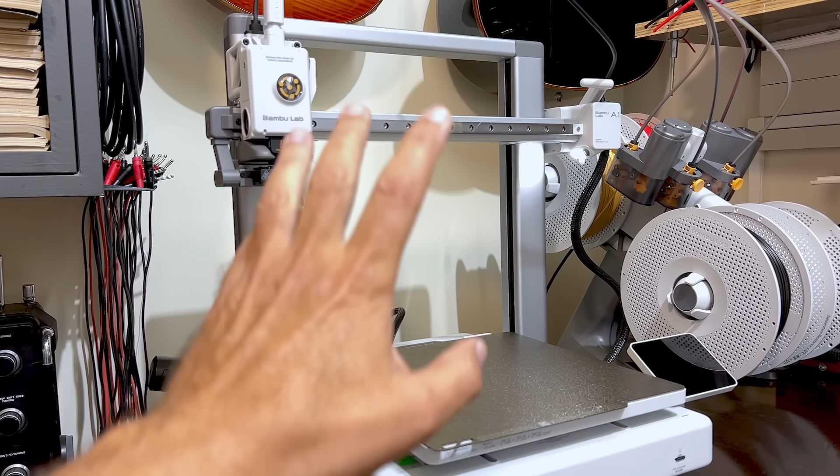And I am going to make one little adaptation to it. I'm probably going to take that unit with the 4 reels or spools of filament and find a way to put it against the wall at the back, because it does take a lot of space. There actually are quite a few designs on the net where they show you how to maybe put it on top. I don't want to do that. It's a bit too heavy for that. There's one where you can put it against the wall or at the back. And that's probably what I'm going to do. And I do want the 4 elements.

This thing actually comes with the possibility of using only 1 spool. So you don't have to use 4 and you don't have to have all the space. The single spool one has an adapter for the top, the feeder. But once you try this, it's difficult to give up on it. And I will be making some adjustments. The beauty of the whole 3D printing thing is that it's like restoration of tube radios. It's a community and people produce stuff and share it and all that.

The other thing I'm going to have to do soon is order another black and another white reel, because the white is going through quite fast. I've done a lot of printing, a lot of testing. As you can see, this is all junk now, but that's what I do when I'm trying to learn something. So I will be needing some white soon, and I do want to use theirs. Theirs comes with an RFID tag on the actual spool so that the printer itself knows what color's there. This is fantastic. You don't have to have that kind of spool, but the ones they have identify themselves, which makes life a lot easier.

So that's been my little saga with the 3D printer. I want to thank Bambu Lab for the printer. I'm so happy that I can say good things about it. If I didn't have good things to say about it, I probably wouldn't say anything. I'm going to use it all the time, and I can say good things about it in good conscience. It's fantastic.